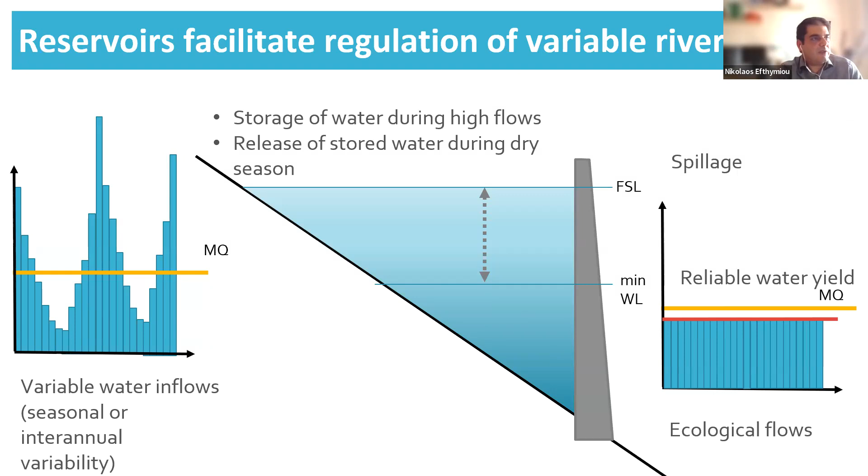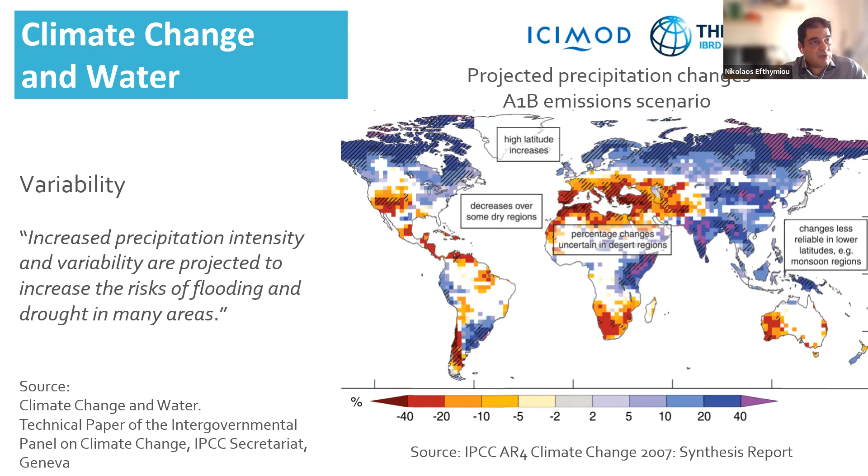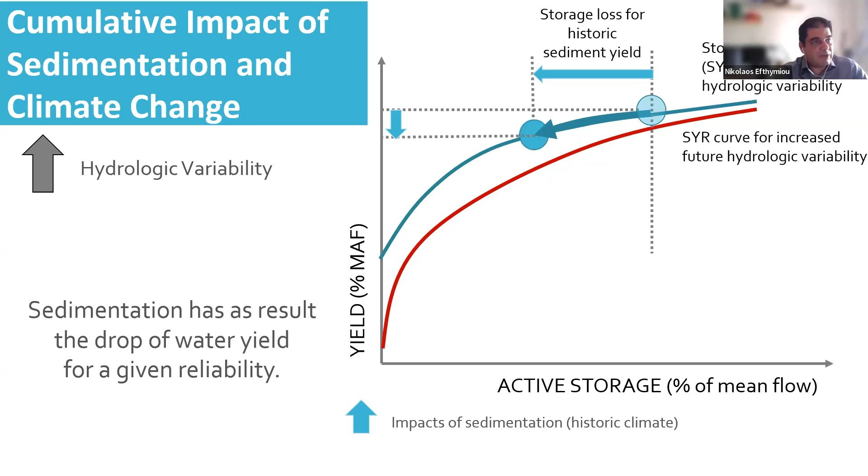So to start with, let's try within 5 or 10 minutes maximum to go through what we saw. I will use the same presentation. First we discussed how reservoirs provide regulation of the naturally variable river flows, why sedimentation is a natural enemy of reservoir storage, and what the global trends are with regards to storage loss due to sedimentation. We discussed the impacts of sedimentation on environment, economic performance and safety of reservoirs and dams, the relationship between climate change and water, not only availability but also variability. What is the combined effect of sedimentation and climate change? We said that climate change will magnify, will exacerbate the already adverse impact of sedimentation on the performance of reservoirs.

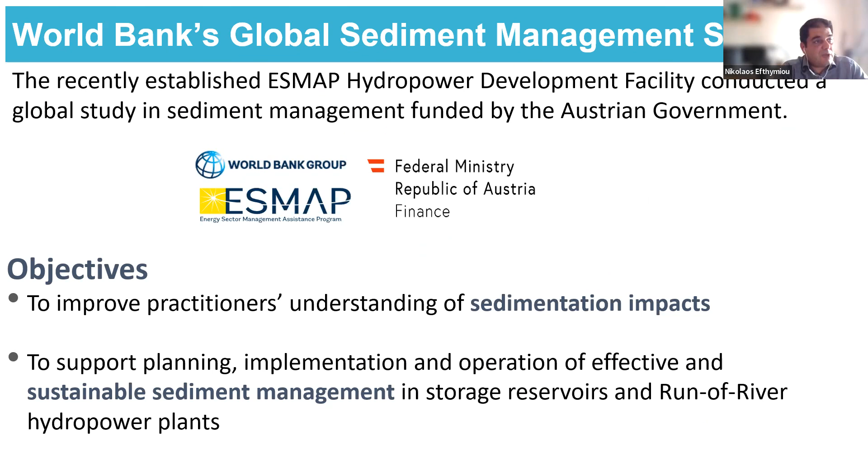And we discussed very briefly the available techniques or strategies to combat reservoir sedimentation: reduction of sediment yield, sediment routing techniques, and deposit removal techniques. A very short presentation of the global sediment management study that was conducted by the World Bank with funding from the Austrian Ministry of Finance, whereby RESCON 2 is a knowledge product of this study. What are the objectives of RESCON 2, which is mostly a preliminary screening of state-of-the-art sediment management alternatives at early project development phases when we have limited data?

What is the theoretical background? A possible source for resources on sediment management, the International Sediment Management Network HydroSedNet, which is freely available on the web. What are the limitations, where we clearly indicated that it is not a numerical model, so it is based on empirical equations and requires limited data. The philosophy is to apply this at the beginning of a project in order to gain a first idea on the risks related to sedimentation and possible sediment management countermeasures.

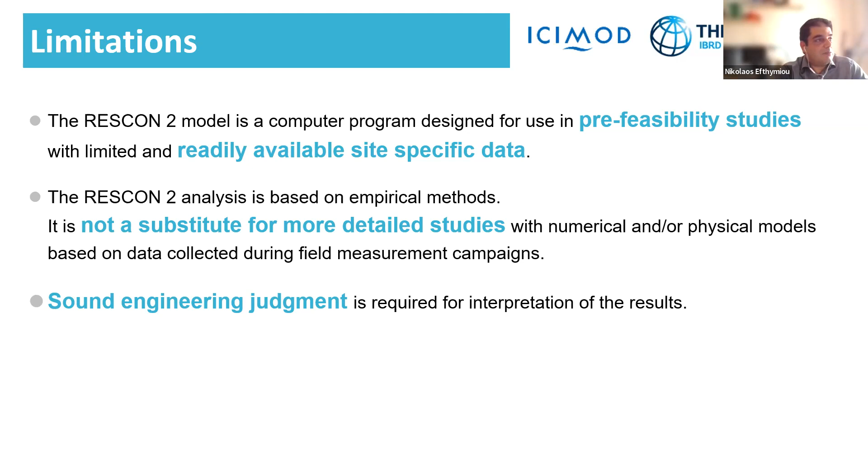The timeline, what are the questions: we start with the basic question, okay, what is the lifetime if we don't do anything? How can sediment management improve things for the historic climate? And of course, how can sediment management improve the resilience of the facility, build resilience into the system? The capabilities focus on sedimentation prediction, evaluation of sediment management alternatives, the economic appraisal, and the climate change analysis.

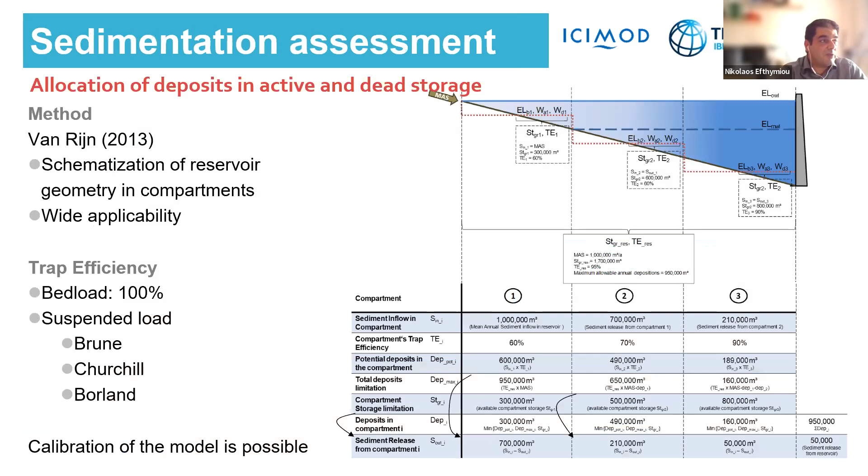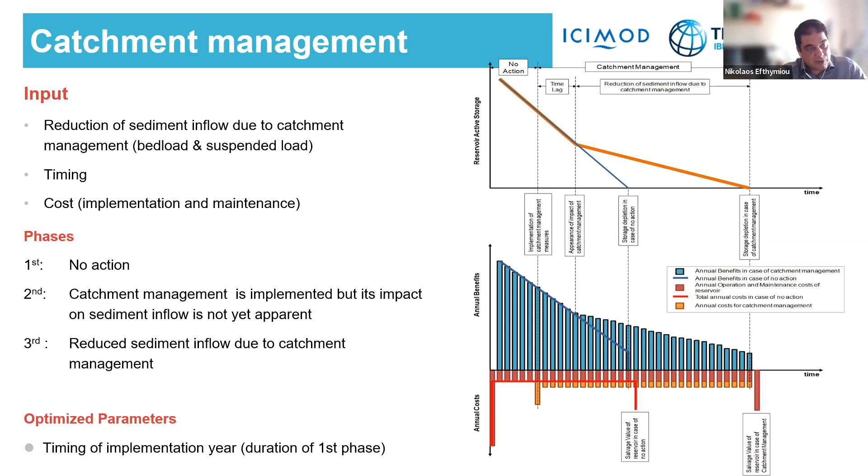We described the flow chart, the different steps for the assessment of the physical performance of the reservoir as well as economic performance. We gave an example to showcase how the extension of the reservoir lifetime can improve the economic performance of the reservoir, as well as to showcase that we must always consider that sediment management also comes at an additional cost that must, of course, be considered in any analysis we perform.

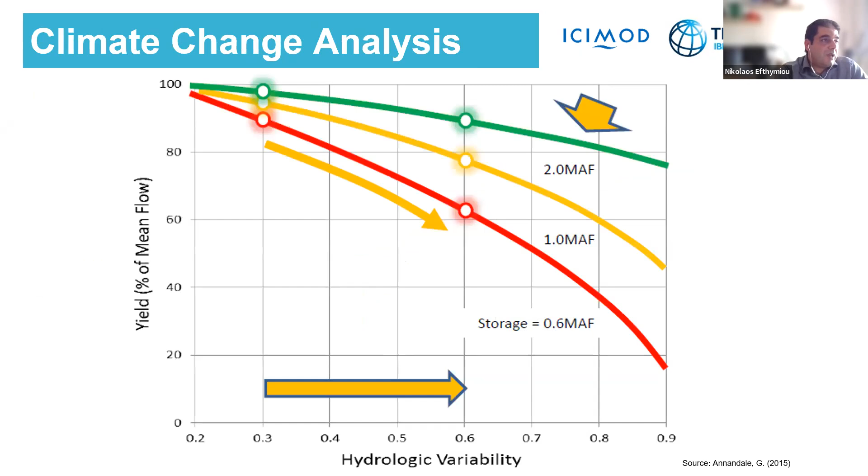We discussed the different types of water yields that can be provided by the reservoir depending on the requirements for flow regulation. We discussed the different types of discounting which are available in order to give value to the future benefits. Again, the climate change analysis and how sediment management can provide an adaptation to anticipated non-stationary climate conditions in the future, and the hydrologic response to changes, anomalies in temperature and precipitation.

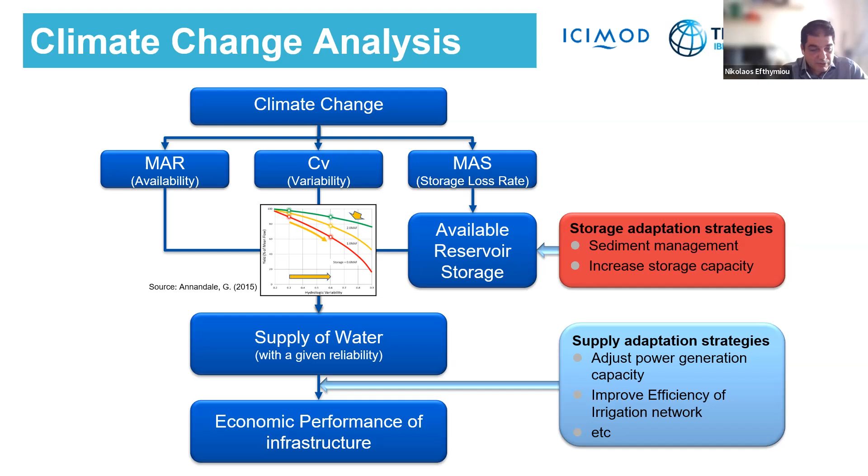A source for the climate change data, a very short indication of how we can see the sensitivity of the economic performance of the reservoir to different climate futures, which are predicted by the global circulation models. And this can be considered a sort of climate stress test for our reservoir to climate change. So all in all, that was what we discussed yesterday.

Then we proceeded with a demo example which we will build on today. We said that the main question we have is what happens if no sediment management is applied. And this is where we stopped yesterday. We saw how to interpret the plots that are generated in RESCON for the sedimentation prediction. And now we will see how we put the input for the economic appraisal for the revenues assessment, and we will also interpret the respective results. After this, I would like you to also open RESCON 2, import the demo file that is included in the training folder, and together we will work on the evaluation of the sediment management strategies.

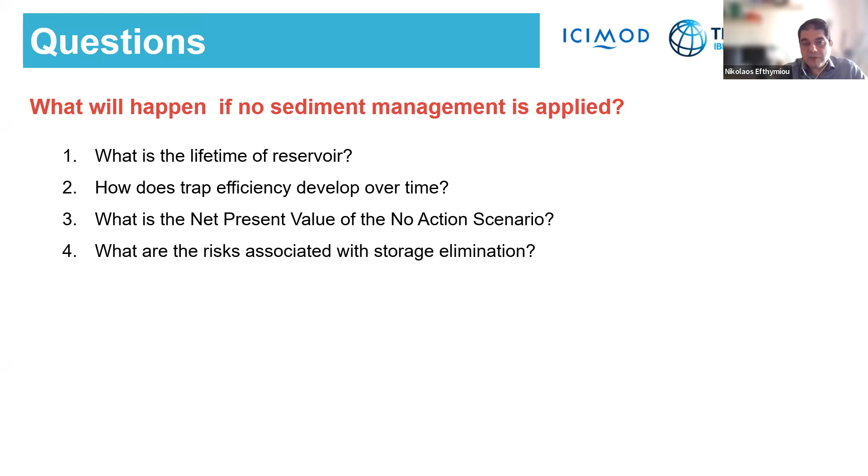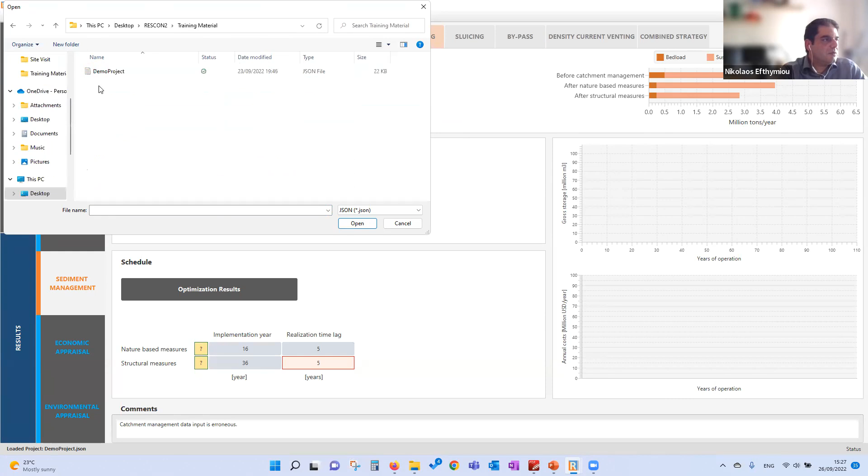So, turning back to RESCON, first let me just import the, sorry, need to find the demo project. So here we had 6.2 million tons per year sediment inflow. If you recall the slide with the presentation of the sample we are working on, we described the input for the cost assessment, we discussed the abrasion risk assessment, and we were on this slide where we are giving the input for the assessment of the revenues generated by the reservoir.

We also discussed the environmental appraisal, so I will not go into detail at this point. After this presentation of the revenues, I would like us to go together through the sediment management alternatives. So to complete the presentation of the basic input, the input that is needed to run at least the no action scenario. First you see we have two main groups. One is the water uses and the water yield evaluation. Here the priorities are fixed and ranked. We start with the most important priority.

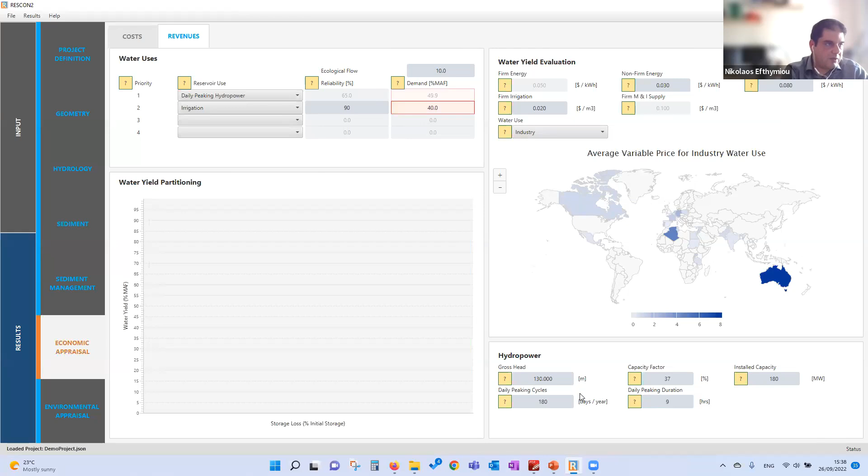Okay, so these are things that we have been trying to resolve in the meanwhile. So what you saw just right now: here, what we see is that the peaking operation will be affected by storage loss, that we see here on the horizontal axis, when the storage loss exceeds approximately 90%. In this case, we have a relatively large reservoir, and the reason is that it is a multi-purpose reservoir that is used also for irrigation.

At this point, the reservoir capacity will reach a level where it will not be possible to store the water that is needed in order to satisfy the peaking operation with duration of 9 hours. So this is why we see this drop here. And of course, at this level, we will not be able to provide any regulation to satisfy the demand for irrigation. So this is just an indication how the extension of reservoir lifetime and conservation of reservoir storage can protect the different beneficial water uses.

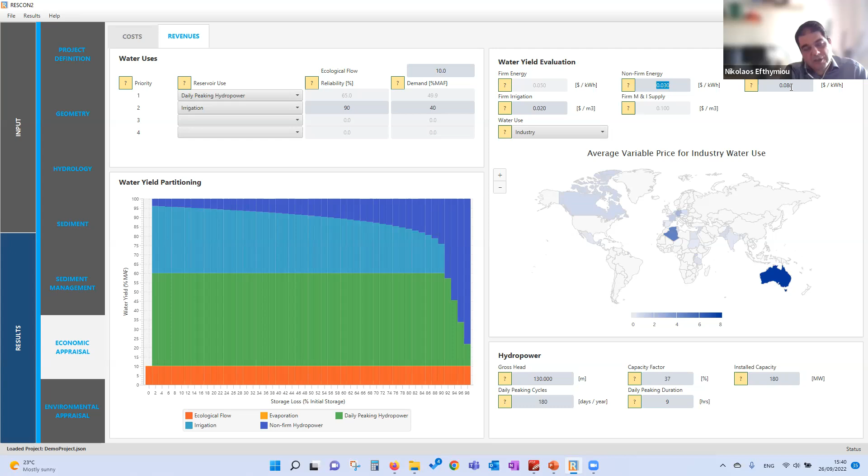So enough with this. Here, what we see is the unit rates that we need to specify in order to monetize the calculated water yields into revenues. Since we have a hydropower use, we have to specify the tariff, the cost in dollars per kilowatt hour for non-dependable, non-firm hydropower production. This is the dark blue color. And for the peak hydroelectricity. As expected, peak hydroelectricity is sold more expensive than the non-dependable run-of-river. This, of course, depends on the power purchase agreement and the legislation in the countries. We have also a different unit rate for the irrigation water yield that is supplied by the reservoir.

And here, this is just indicative. It's important to point out that this map gives some indications on costs for agriculture, domestic and industry water in different countries. This information is outdated. It was included in the manual of the first version of RESCON, but it is used to provide an indication of a range of values if this information is not available at early project development phases. Of course, inflation, the change of the conditions, must be considered. But this aims to provide support during the setup of the model and the preparation of the economic appraisal. So much to the input of revenues.

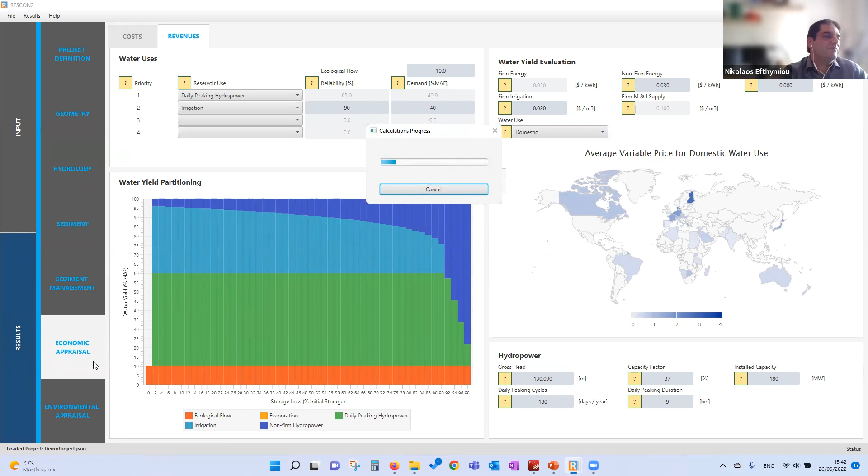Then, if we go to results, let's go to the second row here on this dashboard. First of all, we see again the same plot that we had earlier: how is the allocation of the water yield to the different water uses. Then, based on the specified unit rates, we see the revenues from the different water yields for the different beneficial uses. And here we see the long-term economic performance, which is the sum of the annual net present values calculated based on these annual revenues for different discounting concepts.

Here you see that the economic analysis shows that the aggregate NPV is $215 million. This is our main scenario, the classic exponential discounting, which, if I remember correctly, was performed with a discount rate of 3%, which is specified here.

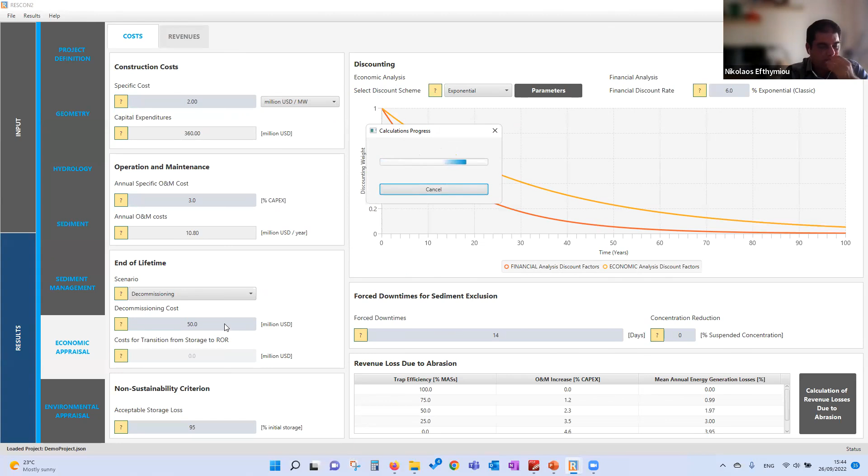Now, from my side, I think that we have seen how we specify the basic input. Now, if we go to sediment management, this is where I would like that we work together, that you will open RESCON, you will import the demo file that is included in the training folder, and then we discuss together how we can assess the different sediment management alternatives.

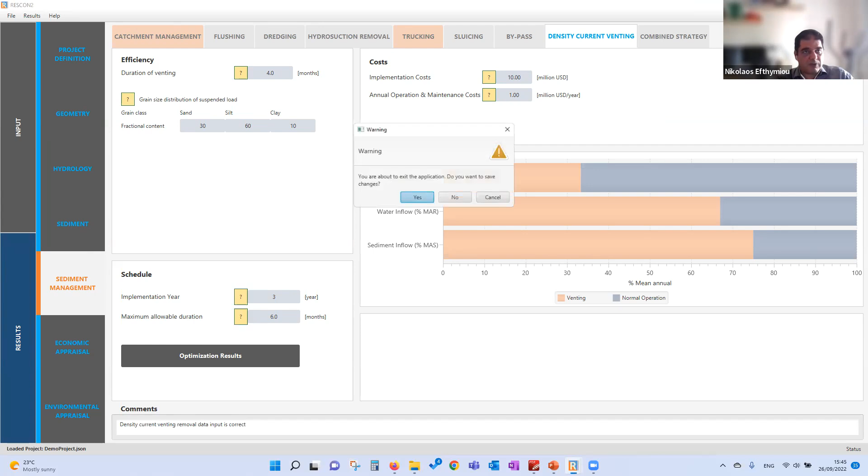Let me start RESCON again, and I will do import project data. I find the demo project and I open this. Please let me know if so far so good. If there are any issues, please raise hand at this phase, because this is an important step, so that everybody, apologies for the MacBook users, the Windows users are able to see the screen that we are looking at here.

So I understand that you are okay. Nicholas, can you repeat once how we import the project demo file? Yeah, how you import the demo? Okay, sorry. So I close this again. We open RESCON. You see the screen? Yes. And we go File, Import Project Data. Then you should see something similar to this. I choose now the location where I have the training material, and I open the demo project JSON file. Okay, thank you. Perfect.

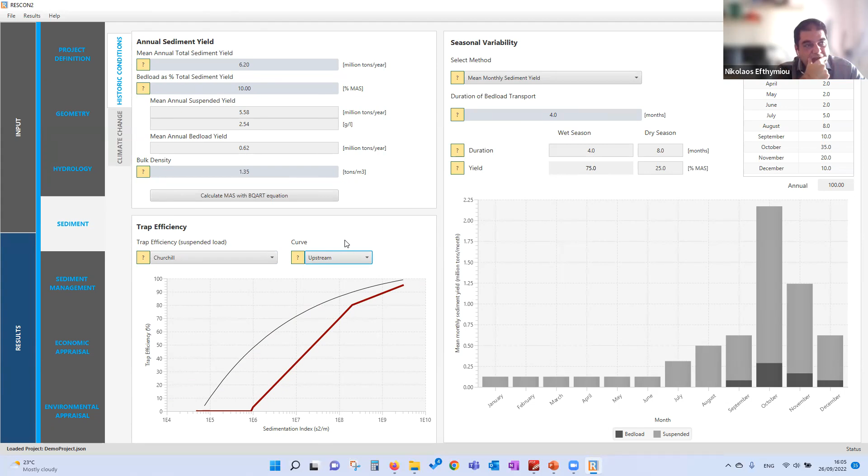I hope this answers the question; this was also one of the questions we received yesterday that we didn't have time for. Please let me know if you think this covers it.

Yeah, Nicholas, thank you so much. We have a couple of comments and a query. Subhas Thapa asks whether it is possible to view the graphs independently.

What do you mean? The graphs you can see, can we view the graphs independently, like individual graphs? For different, the results for different, so to see. Yes, for different parameters. Results for different. So in that case, what we are using, we go to results, export to XLS.

So we write here, now I don't remember, so I think it was Churchill, say now what I would do, Churchill, local, no action, and project, the demo project, so that I don't lose track. And I would save this. And here you see we have the calculated storage.

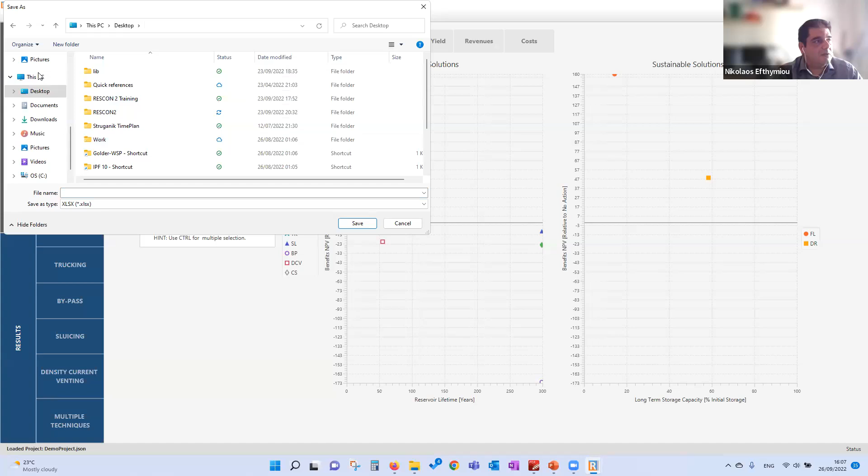Okay. And then what we would need to do is go back to input, sediment. Sorry, it was upstream what we had. Then we go to results, we must calculate first. So the calculation is performed when we press results. And I would go to results, export to XLS. So I will name it upstream.

And then this way we can compare the results of different calculations, even if we are talking for the same scenario. So that means no action, but we want to compare the different results. We will need to generate this Excel file in order to save the results. That was our thinking, because there are really so many parameters that can be changed. So we export this in Excel, and everyone can generate any graphs he thinks would be useful for the type of analysis he or she is conducting.

Yeah, thank you, Nicholas. That was really helpful. I think the others are just brief comments. I'm not sure about the Bharat Paudilji. There is no annual sediment yield showing in sediment section of input. Could you perhaps share your screen to have a look on this? Oh, let me share. Or Bharatji, the issue is resolved? It is resolved, okay. Yeah, the issue has been resolved. So back to you, Nicholas.

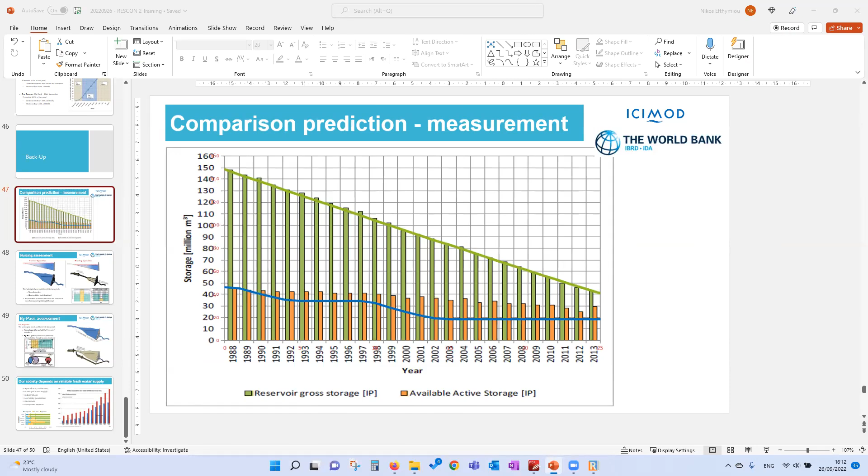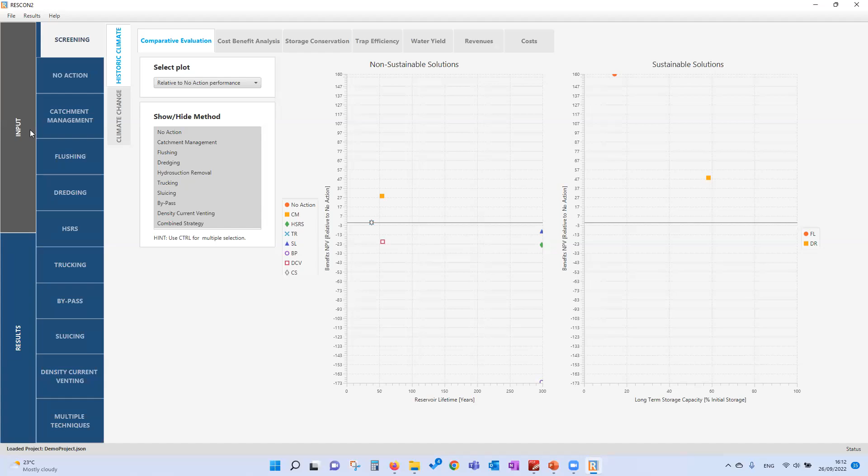Nicholas, could I speak? Yeah, of course. I want to mention that in our trap efficiency curve, I don't have the option of median. There is lower, upper and median, but the median option I cannot select in my case. And another thing is in annual sediment yield, the words or the options are overlapping. This has to do, I think, with you using a small screen. So in your laptop, could that be the case?

So in that case, let me show you how you can do this. You right click on the desktop, and then you go to display settings. And then you can change the display resolution, for example, or the scale. And this way you won't have this issue with the overlapping. The reason was that we need to have a minimum size of the screen. What should be the resolution, Nicholas? What should be the resolution I have to select? Okay, yeah. So the maximum resolution.

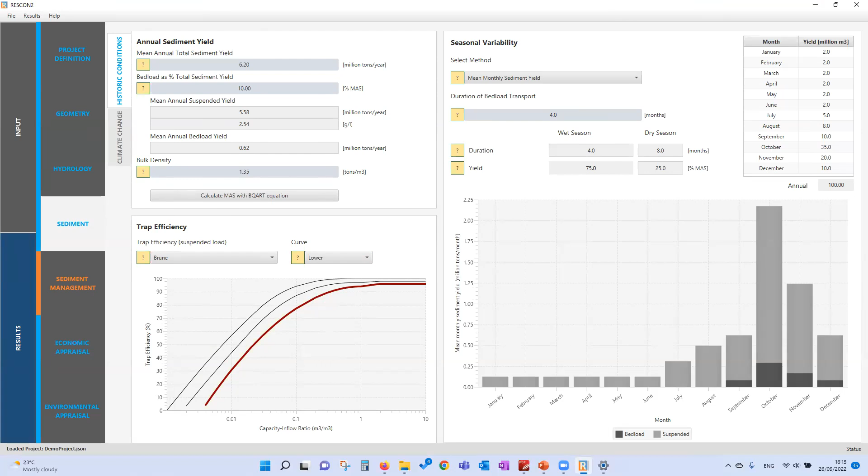Did anybody else see this? No, all good now. So back to you, Nicholas, to proceed ahead.

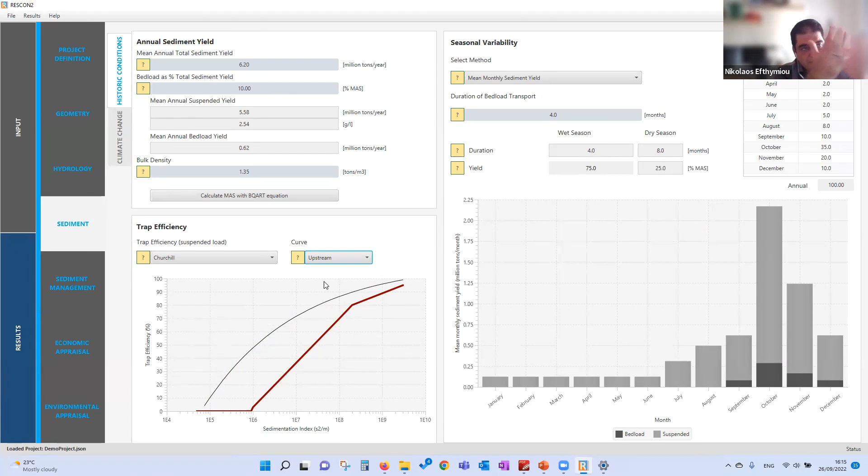Okay. Thank you. So let's go to sediment management. So look, now I have Churchill and upstream as trap efficiency, because we saw that this way we approach the measured storage development. We have the best possible agreement with these options for trap efficiency between measured and calculated storage. So please set as trap efficiency Churchill and upstream. Sorry, my mistake. Sediment, Churchill, and local, because we have no retention upstream.

So we have the 38 years lifetime. Let's go back to results. Let's go to sediment management. And now here, first of all, you see that we have this orange bar here. This shows that there is a mistake somewhere. Then we see that we have catchment management, orange, and trucking, orange. So that means the inputs that we have now in our project file are okay, but there is a mistake in catchment management and in trucking.

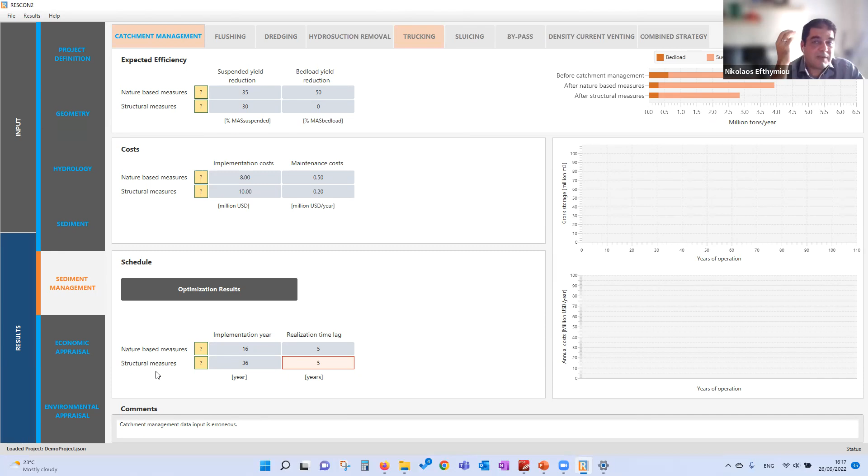And then we see that here we have a mistake at the realization time lag for structural measures. So now, this is my question for you. You remember we calculated a lifetime of 38 years, correct, for the no action scenario. And we see that this 5 that we have here is wrong. Any explanation why this is considered by the model to be wrong?

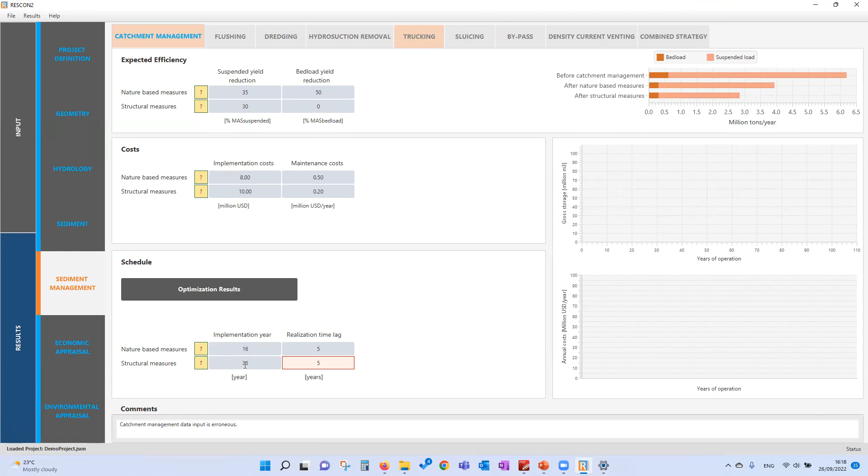All right. So look, we said that the reservoir, if we don't apply any sediment management, will have a lifetime of 38 years, correct? And here what we are specifying is to implement structural measures after 36 years, but the impact on sediment yield reduction will be realized 5 years after implementation of the measures. 36 and 5 makes 41 years.

So that means we are specifying a sediment management strategy which will become effective after our reservoir is totally full with sediment. So this doesn't make sense. Why should we want to reduce the sediment yield arriving at our reservoir when we actually don't have any reservoir? So for this reason, if we do this one, I hope it will work. So you can see that then we can proceed with the calculation of catchment management.

So here now let's go to catchment management. What we can do. First of all, we need to specify what is...

So Sanita, we will come back to you. So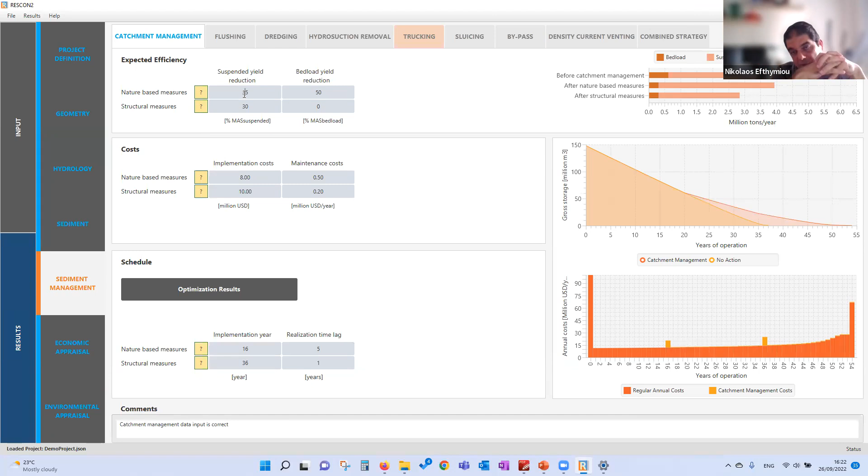Okay, usually if we have an upstream catchment in a normal condition, then based on publications, we can expect a reduction of suspended load of 20 or 30%, and with bed load, depending on the type of measures, we can expect a reduction of 20, 50%, 60%. So what I want to say is don't expect that you can really minimize the sediment inflow.

But what you have to keep in mind is that this depends on the condition of the catchment. If we have a catchment without any vegetation, then if we make a reforestation, of course, this will have a very significant impact. But if we have a catchment with different land uses, where we have forest, where we have agriculture and so on, then, of course, not 80%, but we can expect a reduction of the sediment yield of 30, 40%, 20%. This depends on the extent of the catchment management measures.

As said, this is a separate analysis, and what we are doing here can help to bring together the two different types of analysis. One is the reservoir, the other is the measures in the upstream catchment. Then we need to implement a rough assessment of the respective costs, and then the implementation schedule needs to be specified.

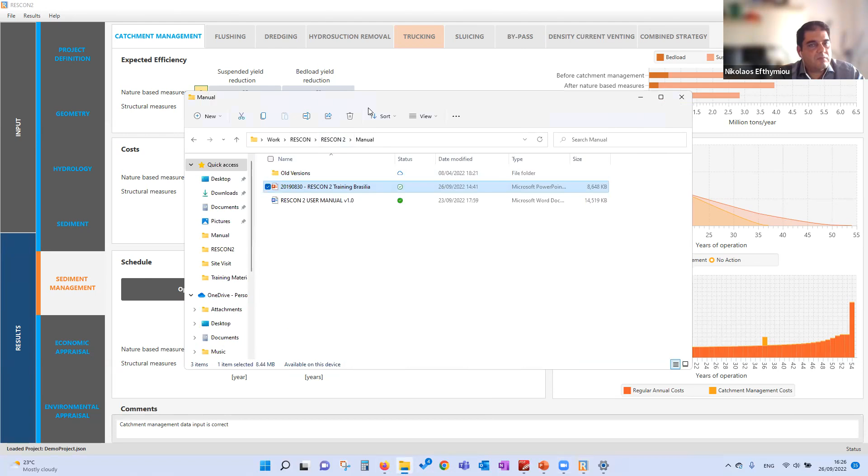Nikolaos, in the meantime, while we are working on this, I have a query for you from Vivek Kushal. He's asking, is it possible to apply measures taken in a similar catchment in case of unavailability of catchment sediment interventions?

Vivek. Vivekji, are you there? I don't think. Yeah. Vivek, perhaps to elaborate a little bit on the question. Yeah. Okay. Vivekji, are you there? Hi, Nikolaos. Yeah.

Hi, Vivek. What I was trying to ask is, if we have applied some intervention measure in a catchment of similar topography or geology, then can we take the results from that catchment and apply some data from it to formulate our sediment management measure in the catchment we are modeling?

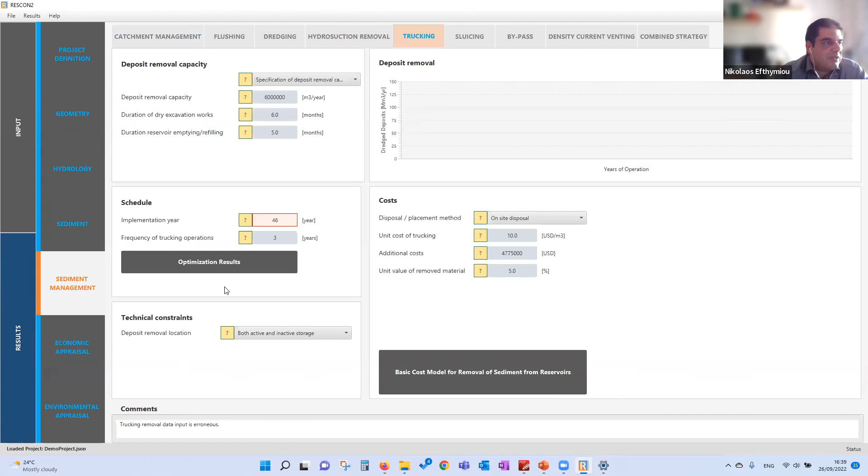As a next step, I would like us to go to dredging. On purpose I changed the sediment inflow from 4 to 6.2 because I wanted to show the calibration, as well as the mistakes that are created in the model and how they can be identified. Here we have again the same mistake in flushing. If we set this to 10, then flushing is implemented before the full sedimentation of our reservoir. So this resolves the problem.

Now let's go to dredging, and keep in mind that the analysis is very similar to flushing. With dredging, we have two answers to two possible questions. The first is, what is the amount of sediment that we must remove with dredging from our reservoir in order to have a sustainable reservoir? This is the question we are asking by setting the combo box to sustainable solution with technical constraints. The other question is, what will happen to our reservoir if we remove, not 32 million, but 3.2 million cubic meters every year?

Okay, then the other input that we give is, okay, when will we implement dredging? First, we need to say when we will start with dredging and how often we will perform dredging. Here, what we see is that we will start after 15 years and we will perform dredging every 1 year.

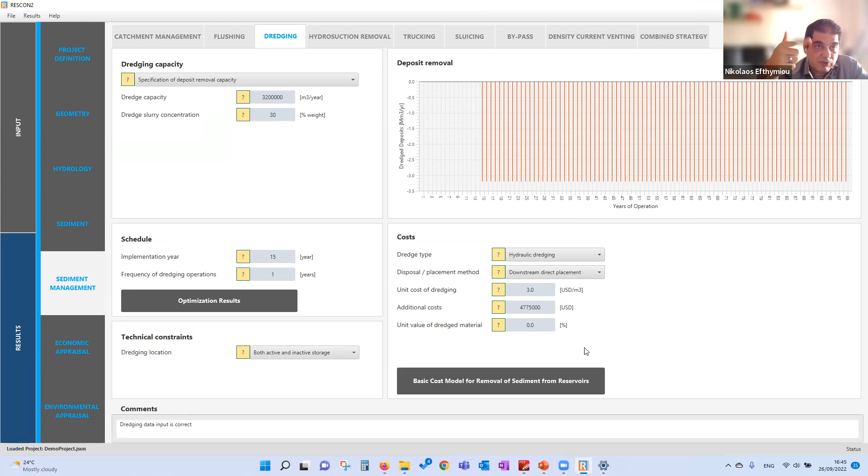And sometimes, if we place the material in upland disposal areas, this material can be reclaimed for beneficial services. For example, sand and gravel can be used as a construction material. Silty sandy material is good for agriculture. So this is something that might give an additional revenue benefit to the dredging operation.

Usually, the unit cost must be obtained based on experience from similar projects. As a preliminary assessment, if this information is not available, we have implemented some guidance from a basic dredging cost model that has been developed by an American dredging company, and which provides indicative unit rates for different components of the dredging activity, as well as for the additional costs. Here we are considering a unit cost of dredging of $3 per cubic meter. This would apply to hydraulic dredging, downstream direct placement.

And so here at this point, I would like you to try different inputs, see what is the reaction of the storage development, and perhaps, after a few minutes, let us discuss these results.

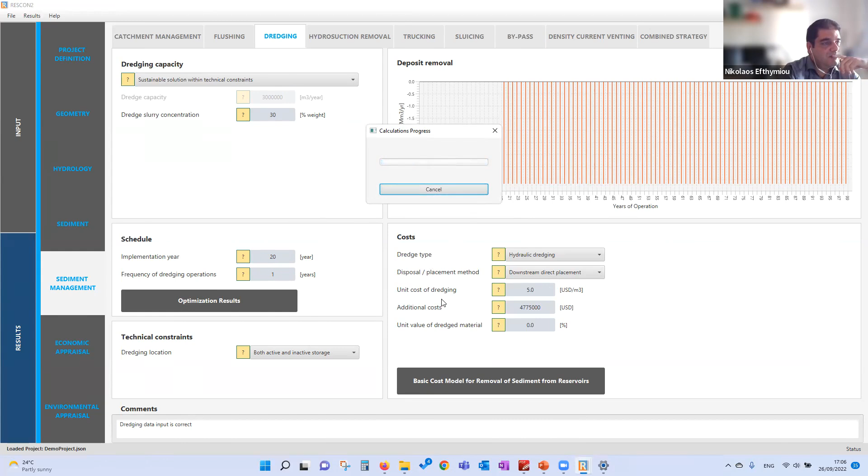Now, Subhas, as you said, if we select sustainable solution and say we implement this after 20 years, we see that in order to sustain the storage capacity at the level that we have after 20 years, we will need to remove 4 million every year. This is a first indication. And if we go to results, we see that here is the point where we implement dredging. And if we remove 4 million every year, approximately, then we can sustain the storage capacity.

The key takeaway here is that, look, here you can specify when you would like to start with dredging. And if you press sustainable solution, it will tell you how much sediment you must remove with dredging this year. The other question is, okay, say that I have a dredge equipment and I want to specify my dredging equipment. I want to see what will happen in my reservoir if I remove 3 or 2 or 5 millions every year, and I start year 5. This way you can see what is the response of the reservoir.

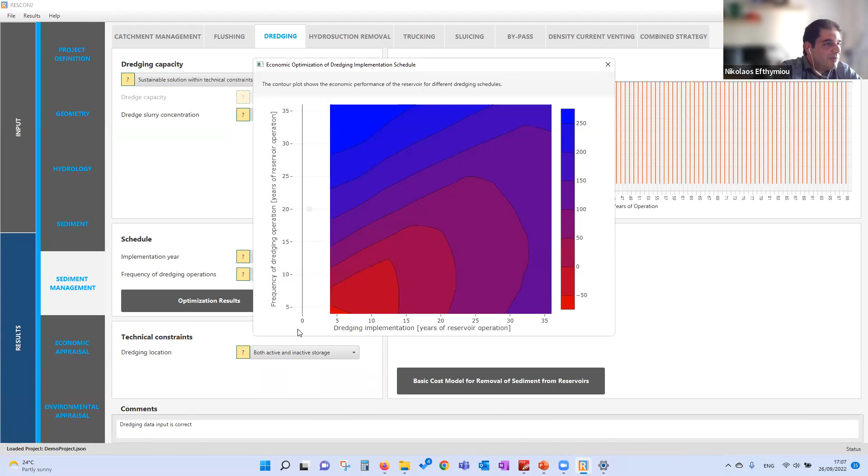Okay. Again, we have same plots for optimization. This looks much more complicated than the previous plot for the catchment management. So here what we see is that with dredging, in that case, it is better to start early and perhaps not perform very frequent.

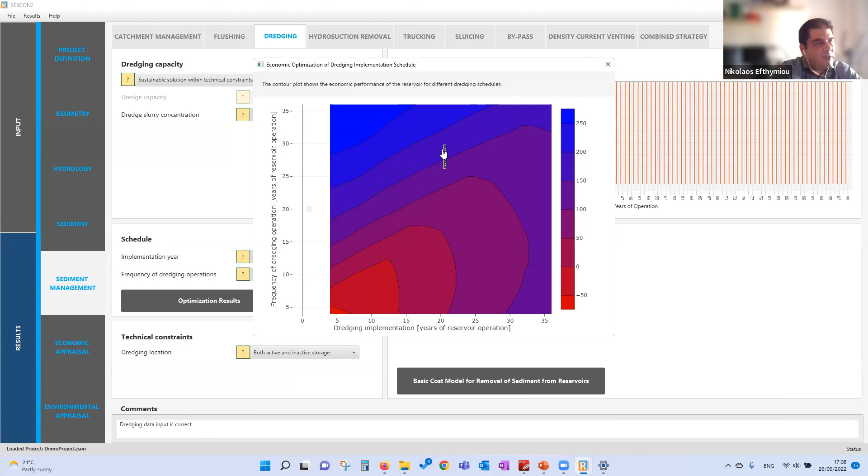Now I would like to move to trucking. I told you that trucking is very similar. The main difference to dredging is that we have significantly higher water losses. Let me go to results. Here we say that we will remove every year, say 3 million. Okay, starting the 10th year, we will perform trucking every 3 years. And here you need to consider that in order to perform trucking, we must empty our reservoir, keep it dry for a duration of the earth moving works, so that we have the earth moving equipment entering our reservoir and removing the material.

So the water losses for trucking are significant. This is something that we must consider. And usually trucking is also relatively more expensive than dredging, depending of course on the amounts that we need to remove.

So we go again back to results. And here what you see is that after the 10th year, actually the year when we are performing trucking, we generate practically zero revenues. Exactly because for the biggest part of the year, we need to have our reservoir empty. That means the water inflow during this period is released downstream and cannot be used for beneficial uses. Okay, and of course you see that we have a very bad economic performance here.

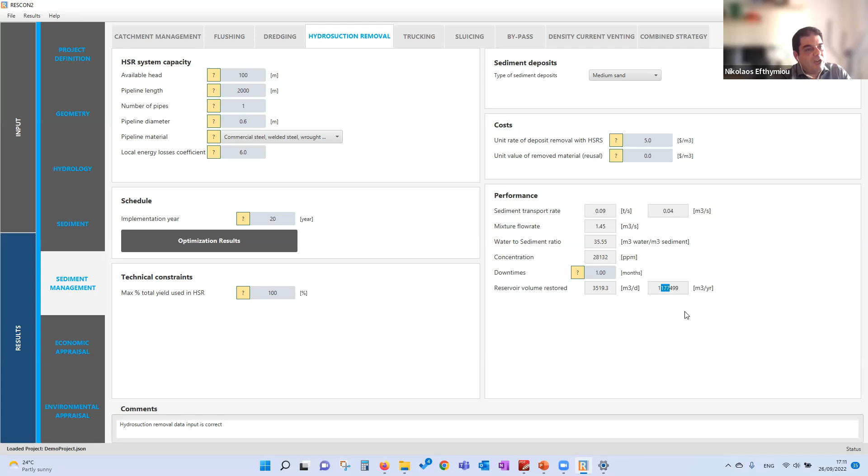This is calculated with an empirical method that has been presented by Hotchkiss in '95. There are also different methods to calculate the performance of hydrosuction. And here we see that actually we can remove, in that case, approximately 1.2 million cubic meter per year. This is the result of the internal calculation. And if we increase the head to 120 meters, then we see that we have a better performance of the hydrosuction, because we have more gravitational head for the siphoning of the sediment deposits.

So here we have one parameter. We assume that hydrosuction will be performed on an annual basis. So that's why we have this plot for the optimization. And here we see that actually hydrosuction would be optimized approximately after 20 years of operation.

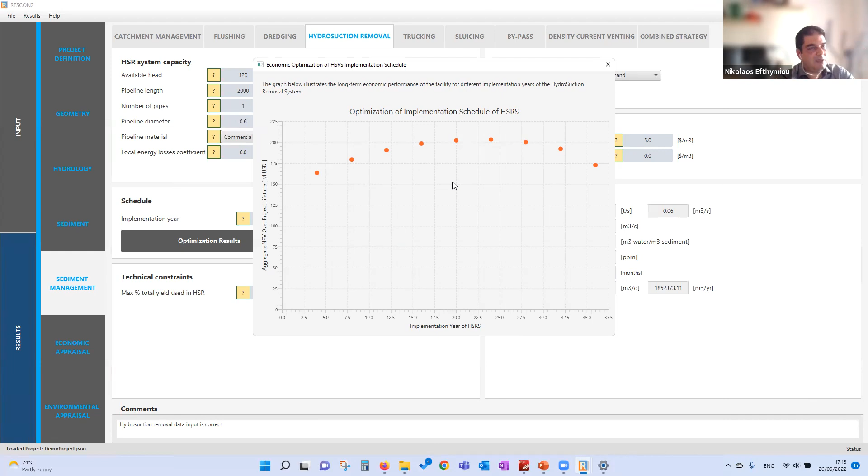The reason for this is that actually the sediment delta by that time would have approached closer to the dam. So that means we would have more availability of sediment deposits in shorter distance from the dam, and hydrosuction would be more effective because we have shorter distance between top delta foreset and release of the discharge pipeline. Of course, this depends also on the type of the sediment deposits. It's easier to remove sandy material than to remove gravel material.

So at this point, I would like you to take again 5 minutes to play a bit around with flushing and hydrosuction. We discussed thoroughly about dredging, so that you get an impression of the reaction of the reservoir, both the sedimentation development and the economic performance to different parameters. And then let's discuss 2 or 3 minutes about this, and then we move on with the other alternatives.

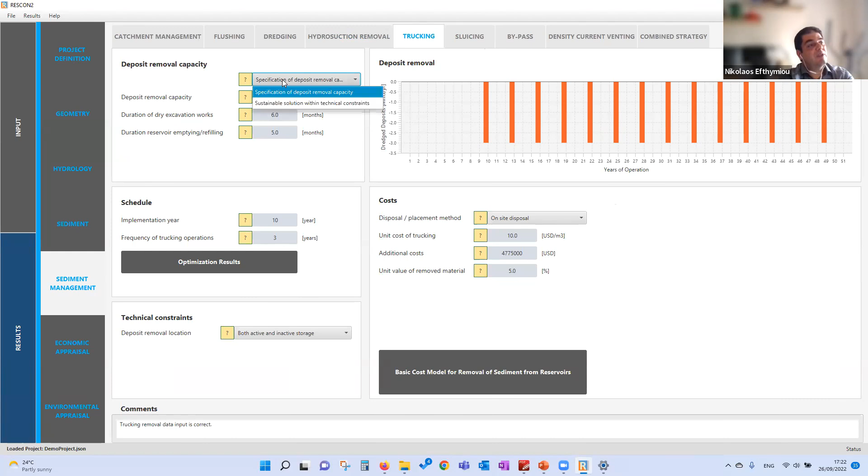Okay. Let me just say a few things. Look, with flushing, again, we have the same logic as with dredging. So we can answer two types of questions: what is the amount of material that needs to be removed during each event in order to have sustainable conservation of our reservoir storage after the time we implement this alternative, and what is the development if we remove during each event a specific amount of sediment. So I would not say that there is a big difference, and the logic is more or less the same.

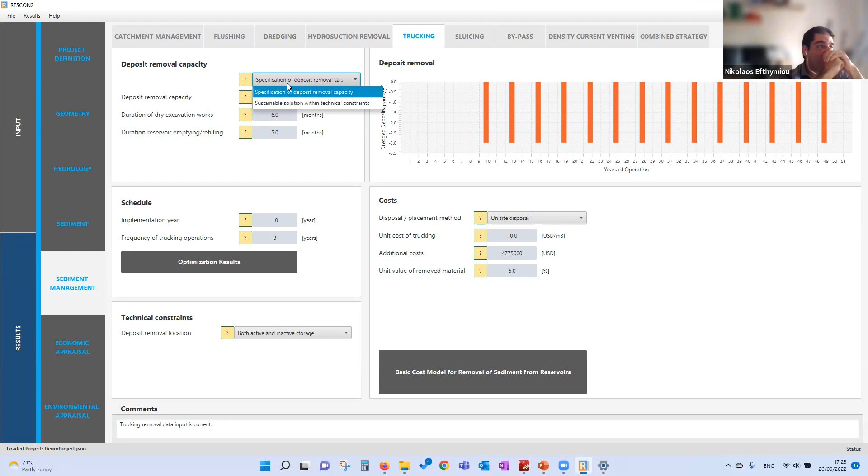The important difference is that flushing is associated with higher downtimes and outages, meaning more water losses and revenue losses than dredging. Now for hydrosuction, say that we have 100 meter available head, and we will implement hydrosuction after 10 years. We go to results.

So we see that we are removing close to 1.2 million cubic meter per year after the implementation. We have insignificant water losses for hydrosuction, and we have an extension of the reservoir lifetime from 38 to close to 50 years, and then we maintain this residual storage capacity of 1.2 million. This is the amount that we can remove every year.

Now, if we go to input and we say that we have 120 meter head and we use 2 pipes, you see that we can remove 3.7 million cubic meter per year. And we go to results. You see that we have a different picture. So hydrosuction is much more effective. The reason is that we have more head, so actually more energy to remove material. And we have doubled the pipelines that are used. So these are the key parameters.

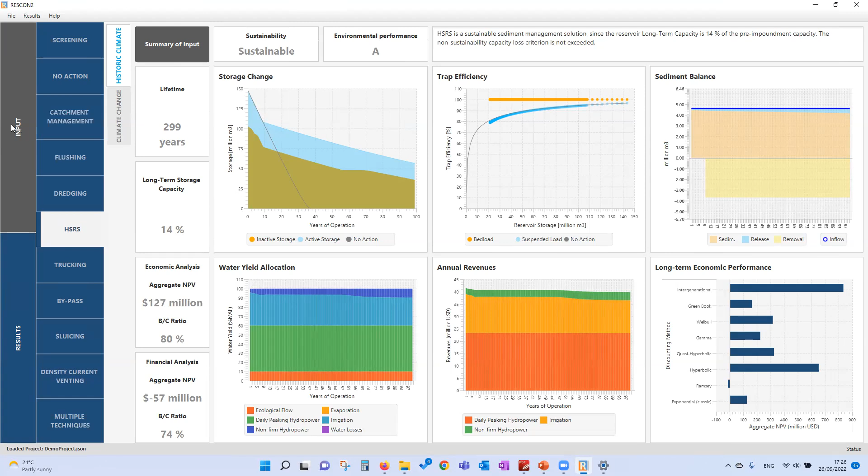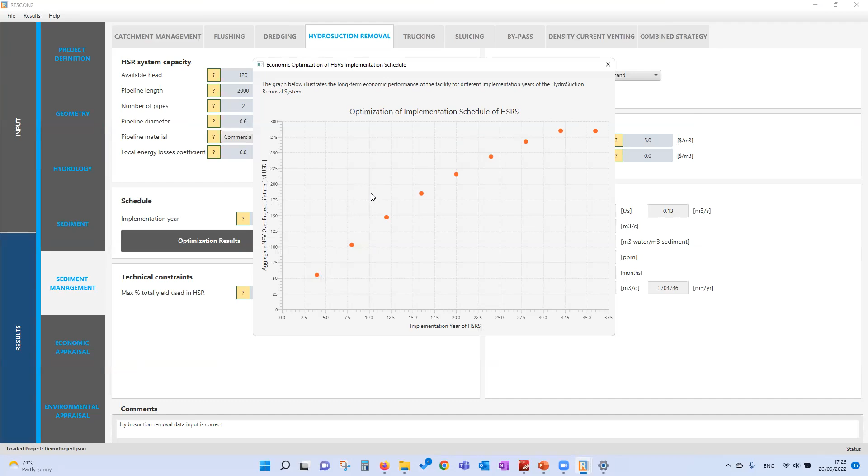Another thing is that in the optimization chart which you have also inserted there, it shows the most optimal time for the implementation of hydrosuction is around 20 years. Correct? So is it due to the capex, capital expenditures related to installation of hydrosuction infrastructure, or are there any technical reasons? Because I found that very interesting.

Look, what we say here, given this example, is that the pipeline length for the hydrosuction is 2 kilometers. So if we install it the first year, our reservoir has a length of 3.5 kilometers, if you remember. So if we implement hydrosuction from the first year, we can remove deposits that extend practically 2 kilometers upstream of the dam.

But the first year of reservoir, we said that delta progresses from the reservoir headwaters toward the dam, right? So that means the first year of operation, at the distance of 2 kilometers from the dam, we don't expect to have deposits because the deposits are located further upstream, close to the reservoir headwaters.

After a few years, and as the delta progresses, then actually we are removing sediment effectively. So practically what this shows is that there is no need to implement so early hydrosuction in a reservoir with a distance of 3.5 kilometers, because we don't have sediment to remove at the distance of 2 kilometers. If we wait until the delta reaches the area, then it is the time when hydrosuction becomes effective. I hope this answers the question.

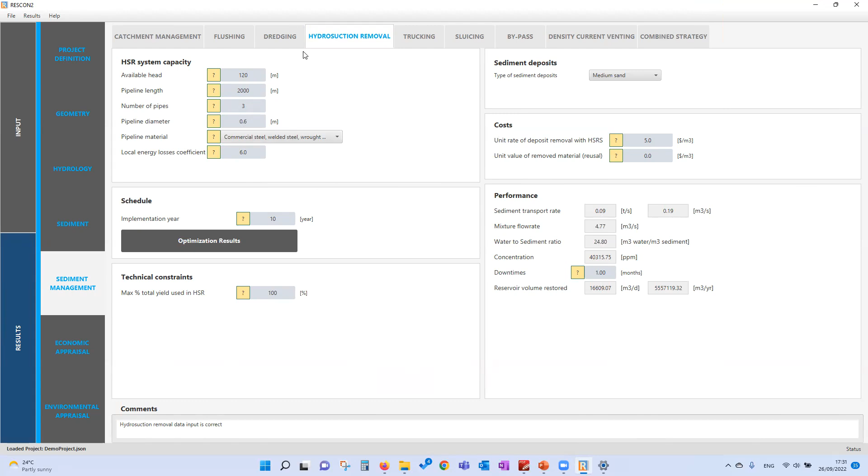So then we go to flushing and look here, the controlling parameters: how aggressive flushing will be is what is the flushing discharge. So here it's important to point out that we are talking about reservoir empty flushing. That means we will empty our reservoir till this elevation, the water level at dam during flushing. This is going to be the invert of the flushing channel that will be scoured in the sediment deposits. Here, this is a typical cross-section of our reservoir.

And 180, here is the elevation where we have the drawdown during flushing operation. This is the average discharge during the flushing event. Okay. Here we specify what is the duration for flushing during drawdown conditions, how much time it takes to empty the reservoir. And here we specify also parameters that can help us calibrate the flushing assessment.

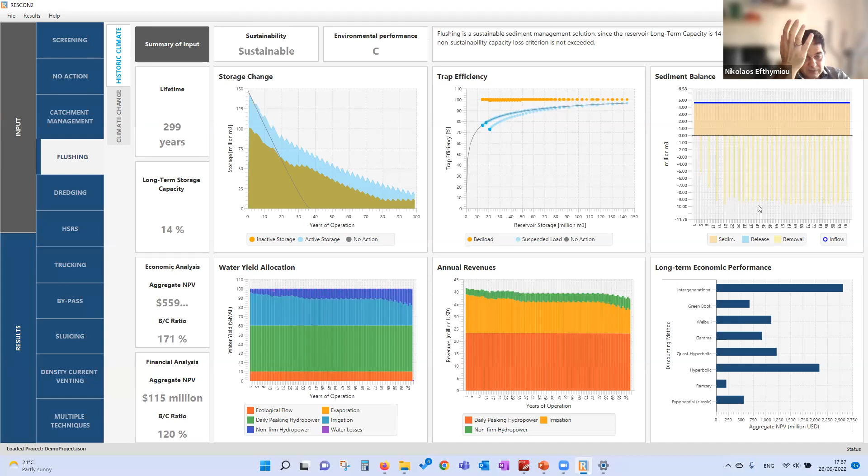The principle is again the same. Here you see, perhaps it's a little bit difficult to identify the deposit removal. Yesterday we had a question about downstream impacts. What I would like you to consider is that in a very short time, here we said perform flushing every 3 years, we release downstream a big amount of sediment deposits, in this case 9 million.

You can imagine that we have the sedimentation that occurred during 3 years within the area where flushing is effective, and we remove the sediment deposits in a very short time of 1 day. This creates an overloading, a sediment pulse downstream, that is very difficult for the river to manage. So this is why flushing requires very careful planning.

We must consider how much water will be released downstream and how often flushing will be performed, and we really try to reduce the amount of sediment deposits removed during this very short time period in order to reduce the concentration that is released downstream.

As said, there is a lot of work done in different countries, especially in Switzerland and France, on environmentally adapted flushing, which is combined with sediment monitoring, and the purpose is to avoid exceeding specific sediment concentration thresholds that might be harmful for the aquatic population downstream of the dam.

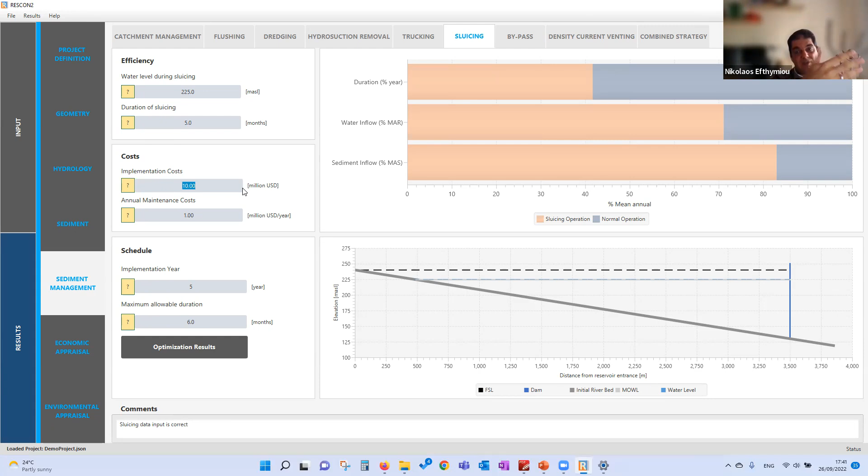Again, we need an assessment of the respective costs for the implementation. For example, if our reservoir doesn't have a gated spillway, it's not possible to control the water level as we would like and to have controlled hydraulic conditions in our reservoir. In that case, we would need to retrofit a spillway suitable for sluicing operation. And again, we need to specify the schedule. For bypass, it is the same principle that we are applying, and for density current venting.

At this point, I would like you to take a few minutes to change parameters to see how it reacts, and then let us discuss shortly the reaction of the reservoir to different combinations of parameters for sluicing, bypass, and density current venting.

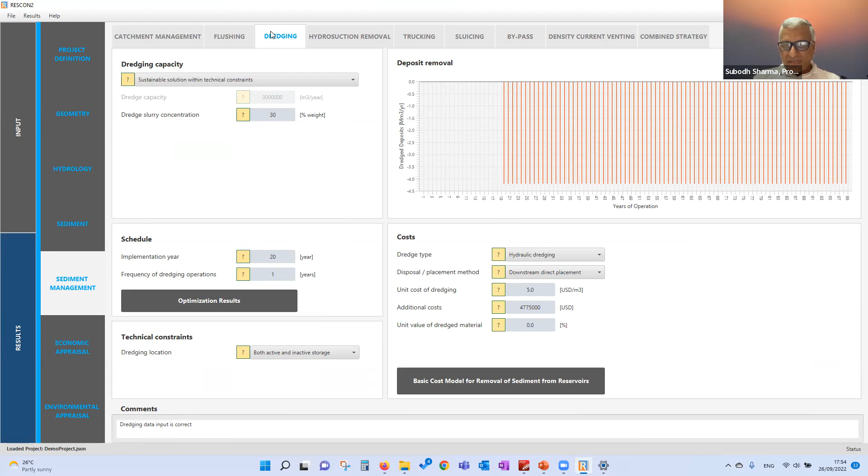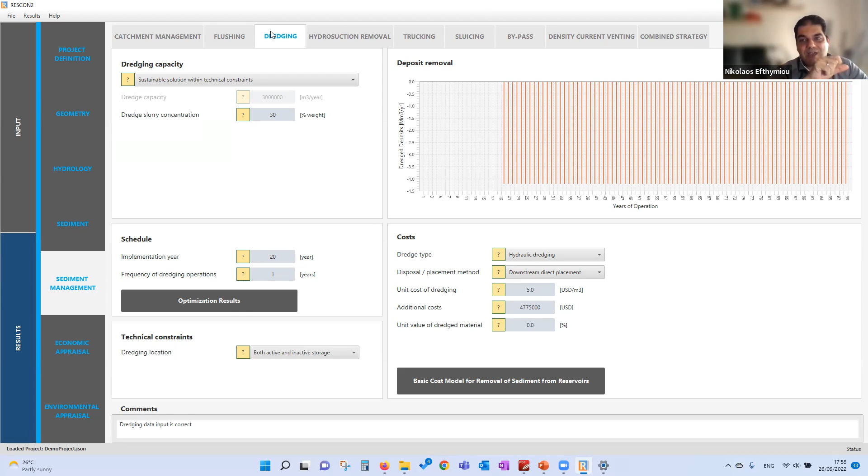Mm-hmm. Professor, thank you very much for the intervention. Very interesting, as you say. So the downstream impacts are important aspects that must be considered. Unfortunately, in RESCON, the seasonal variability of flow on the dredging assessment is not considered. But if you remember in the presentation, one point was that engineering judgment is required. So it's a combination of sedimentation assessment, downstream impacts, and the prevailing hydrology.

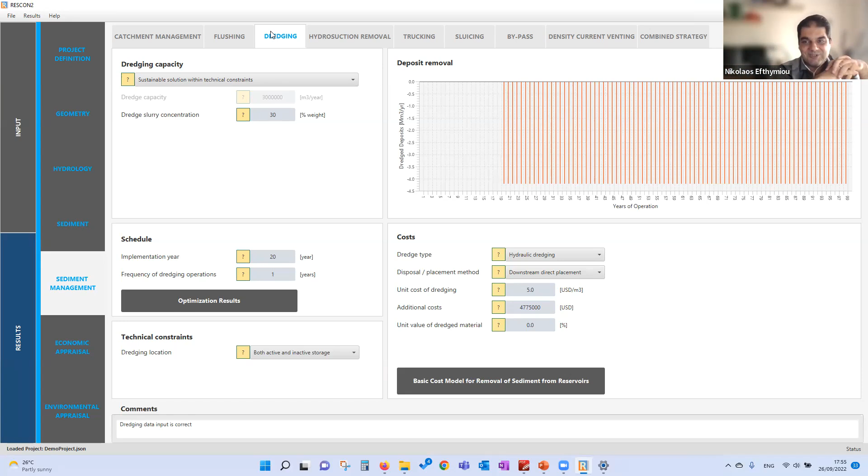And of course, this model provides some indication on the amounts. When we go to downstream, then all of what you mentioned must be considered. And sound engineering judgment is very important. So thank you very much for your comment in this lecture.

Yeah, thank you for responding. It's really helpful.

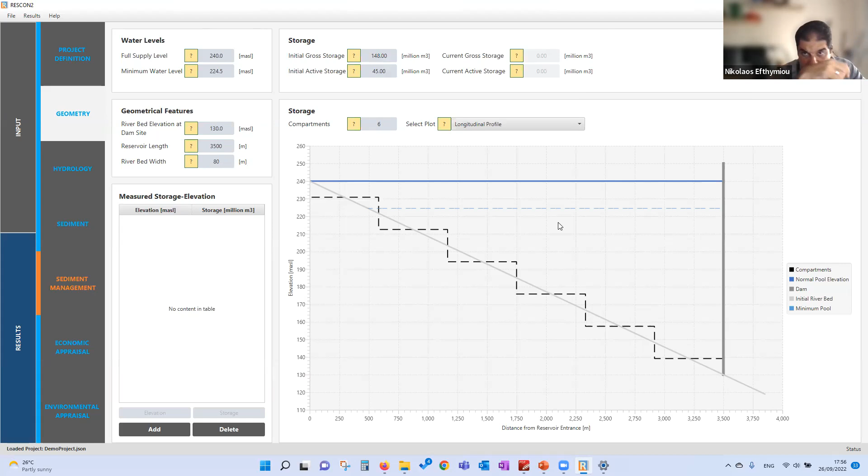Okay. So now when we go to sluicing, I see there was a comment that we had a specification of water level during sluicing of 100 meters. So this should generate an error in the assessment, meaning that this is not an acceptable input. The reason for this is that the lowest point of our reservoir, the riverbed elevation at the dam axis, is at 130 meters above sea level. So we cannot have a water level drawdown below 130. I hope that this explains the reason for this error.

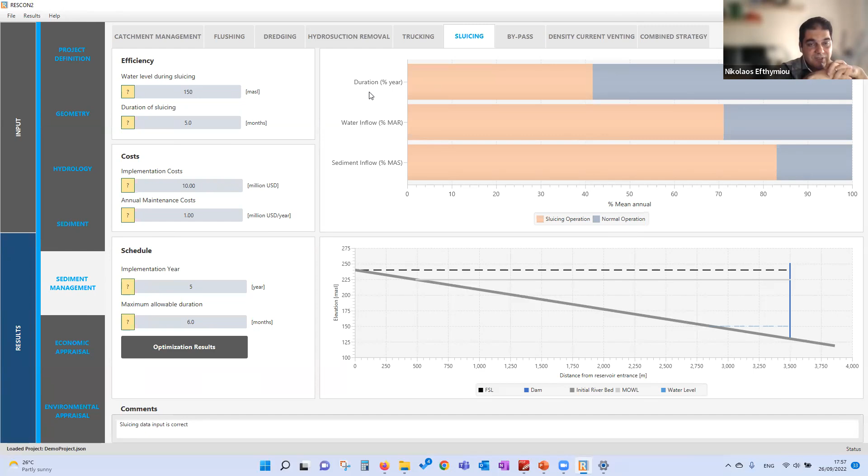So at this point, anyone who would like to give some impressions of the performance of the reservoir for different parameters affecting the efficiency of sluicing or bypass? I see that you prefer to put the questions in the chat. That's okay. Let me perhaps give a comparative evaluation. Say that we have a water level during sluicing of 225. We go to results and we have a duration of 5 months.

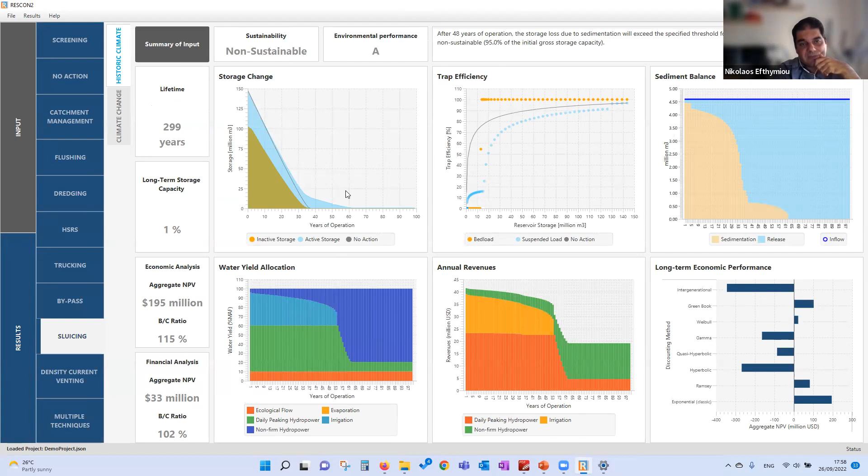First of all, I would like you to see that in the first years, sluicing is not very effective. Try to imagine that we have an empty reservoir. We lower the water level during the wet season, but at the same time our dead storage is relatively empty. So what we are doing is a rearrangement of the sedimentation, moving sediment from the delta to the deeper parts. For this reason, we don't see any significant impact on the active storage development.

And we start seeing the impact compared to no action after a few years, when we have filled our dead storage, and at that point we start protecting the active storage more. The other point I would like to highlight in the economic performance is that we don't see water losses for sluicing. The reason is, if we go back to geometry, the water level during sluicing is at 225 meters above sea level, and our minimum operating water level is at 224.5. So during sluicing, we can run our turbines.

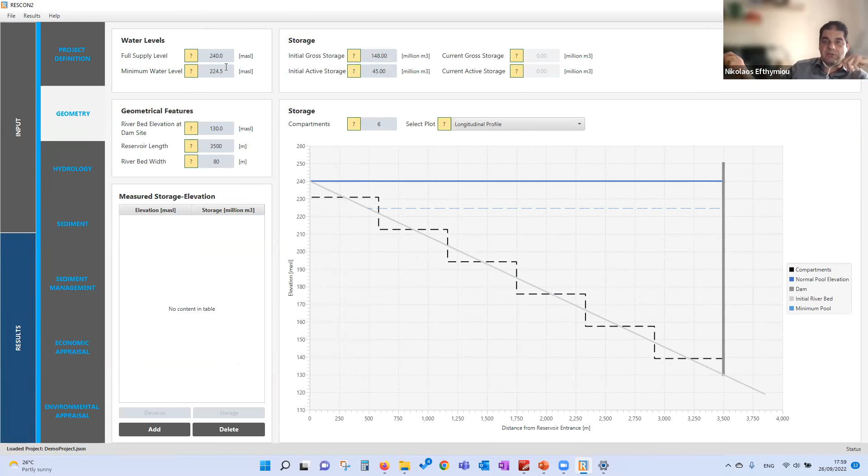Now, if we go to sluicing and we say, okay, what will happen if I do a very aggressive water level drawdown to 180 meters above sea level, we go to results.

We see that sluicing is much more effective, but at the same time, we see that this affects a lot the economic performance of the reservoir. The reason is that for 5 months, actually the 5 wettest months of the year, we're saying, okay, I will operate my reservoir below the minimum operating water level.

I will not generate. I will not be able to store water for the dry season, since we have the storage operation. On one hand, I can sustain the storage capacity, but on the other hand, I cannot use the water that arrives during the sluicing period for the beneficial services. So this is something that needs to be considered. This is the compromise during sluicing planning.

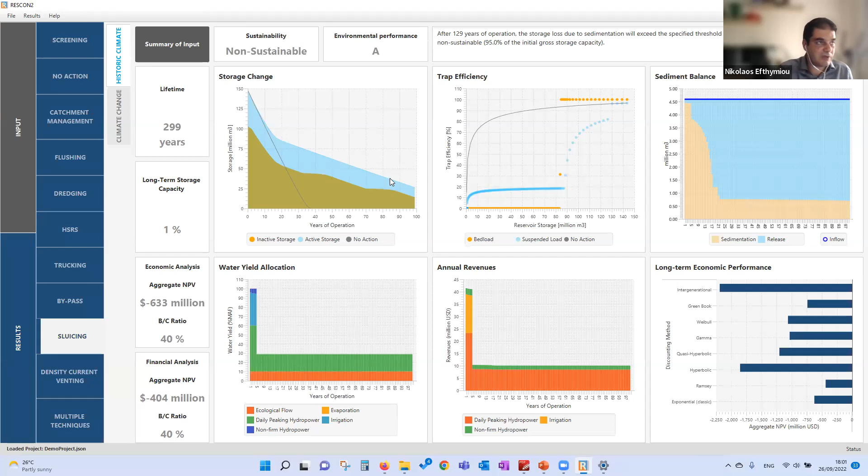What is the water level that can, on one hand, protect my storage, and on the other hand, not affect significantly the economic performance of the reservoir? Same considerations apply also for bypass. So here the duration of bypass is a very significant aspect, and the amount of the water inflow, the efficiency of water inflow diversion.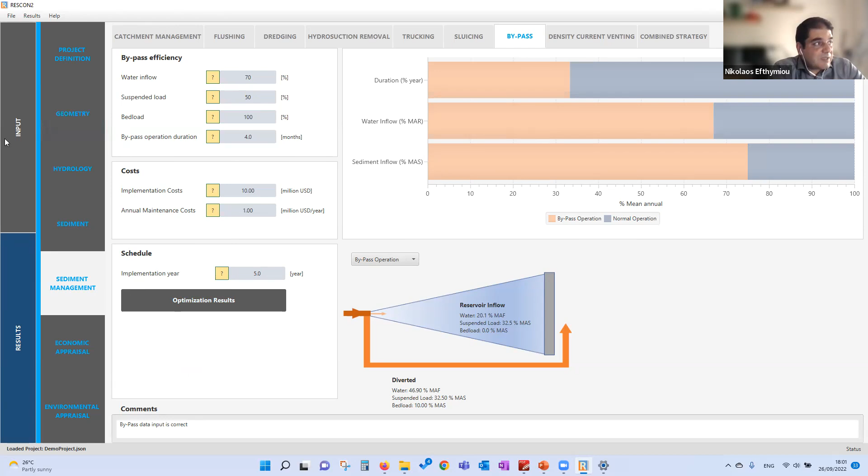We will see this tomorrow during the example that we will run on the flushing operation. At this point, I would like to return back and we go again to hydrology. I would like to show you how we can retrieve data for the climate change analysis that we will run tomorrow.

So what we can do is in Google we write World Bank Climate Change Knowledge Portal. The first link, and then we go here, it is the first page. So please go to watershed, select a watershed that is relevant for our project here. And then we go to climate projections.

So here you see different types of information. What we need for the RESCON 2 analysis is, first of all, the change in mean temperature and the change in precipitation. We'll change this again. So the precipitation percent change. Okay. Let's do the temperature.

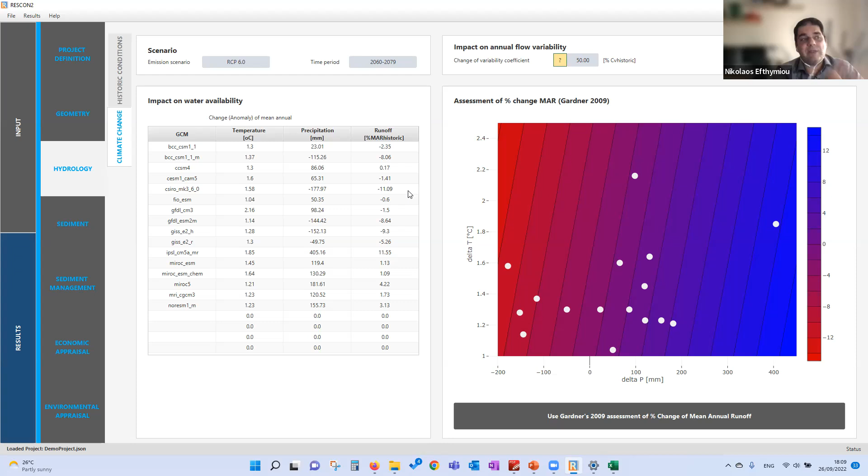Two possibilities: either we have our modeling done and we specify manually the hydrological response, or, if not available, a preliminary assessment through an empirical equation. Same applies also for the temperature and for the future sediment yield conditions. This input here you cannot double click, because this has been specified earlier in the hydrological climate change data.

But what you can do is, if you have a catchment model for the upstream catchment, you can calculate and insert here manually the anticipated impact of climate change on sediment load arriving at the reservoir. If not available, here you can insert some input that is introduced in the empirical equation that we have implemented in RESCON, and you can obtain a tentative and preliminary empirical assessment of the impact of climate change on sediment load.

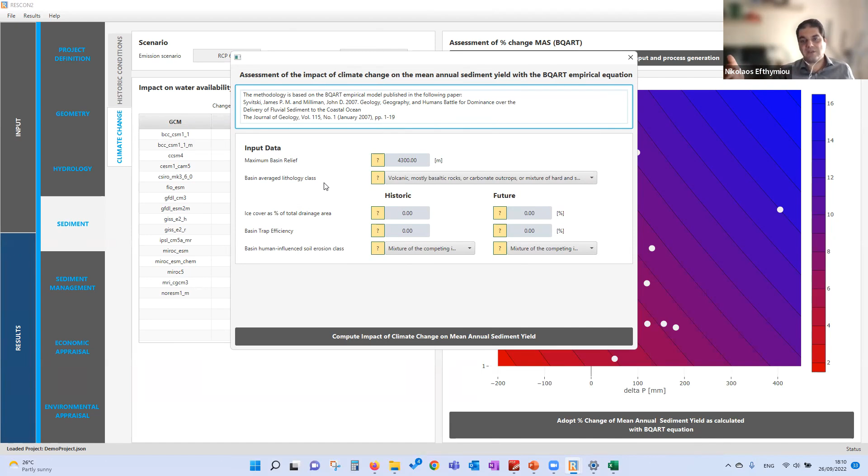You need to compare the historic with the future conditions, and it is a relative assessment. So what we do is we calculate with the empirical equation the sediment load for the historic conditions. We calculate the sediment load for the future conditions, and then we say, okay, we see an increase according to the empirical equation of 30% for these conditions. So we take the sediment load that we have specified and we increase it by 30%. So this is how it works.

And tomorrow we will go through this climate change analysis to see how sediment management can be analyzed as an adaptation strategy to climate change.

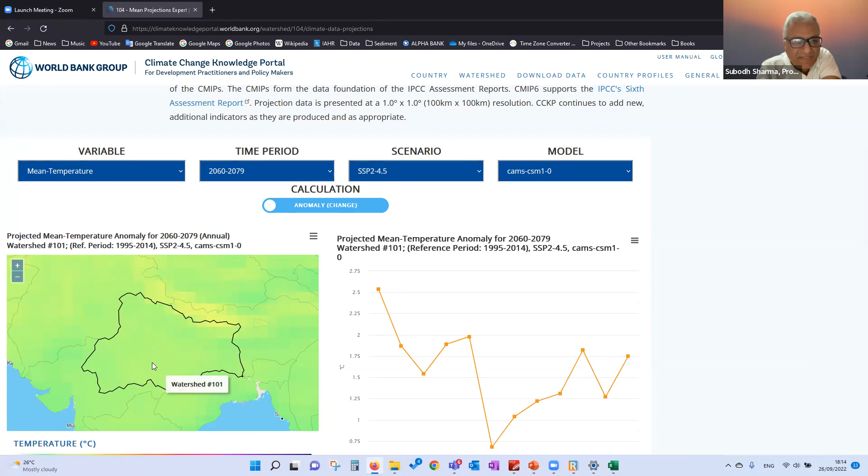But as an exercise, if you wish, I would suggest that we go to the Climate Change Knowledge Portal and use watershed 104 or watershed 103. I think that watershed 104 would be more representative of Nepal conditions. Is this right? Well, I doubt 104 would be representative. You are referring to the Western Ghats. Yeah, if you go further north, minimize, and then which one is this now? This is 101. Yeah, this again looks like lowland.

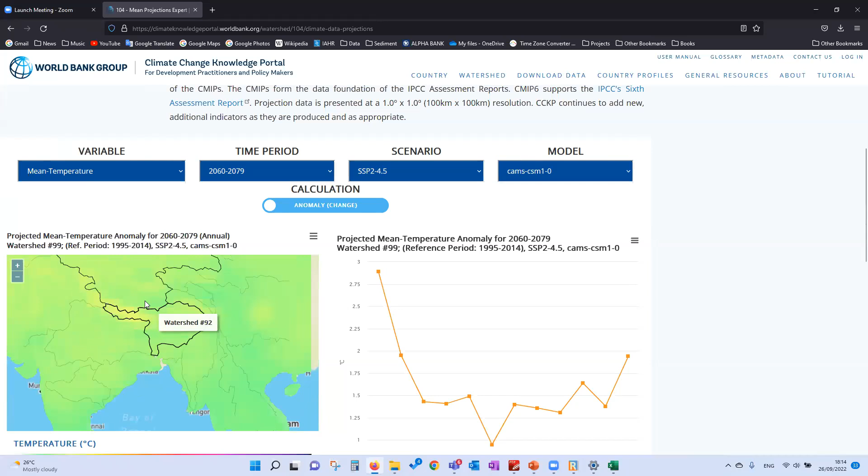Could you minimize a little bit? Yeah, this is 99. I think 99 could be okay. It looks like 99 would be quite close to Nepalese terrain. Yeah, it covers more of our area, possibly. Because 92, averaging here would be... I think 92 is too much, we cannot use that one. Chinese, maybe. So the 179? 179 is too far. Okay, then 99. Yes, 99 should be okay, because 179 again is a different territory, covering Southeast Asia.

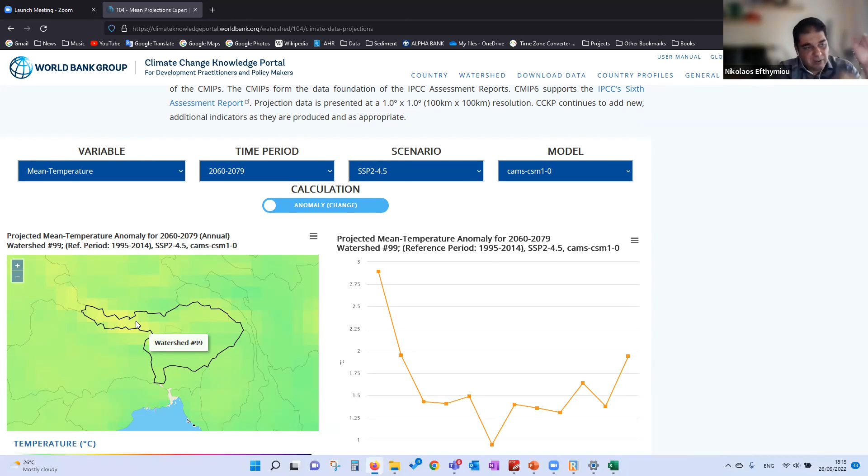Okay. So, whoever is interested, if you would like to try to download the data, I said, please, we need this in the format that you see here in this table. So the change of the mean annual temperature in absolute numbers and the change of precipitation in millimeter. Okay, we will need to process this and then we can go through together tomorrow to see how this is introduced into the model.

If you're okay with this. Yeah, I would like to see how we are also with time tomorrow. So actually to try to see as much as possible from the assessment and to see also the climate change analysis, the results. There is quite a lot to discuss there. And we see also with time, so we can discuss also several days. Let's try to take the maximum from the 3 hours that we have. Yeah, we have the same time tomorrow from Nepal time 6 to 9. Yeah, but that will also include a closing session and also certificate distribution. All right. Briefly, yeah.

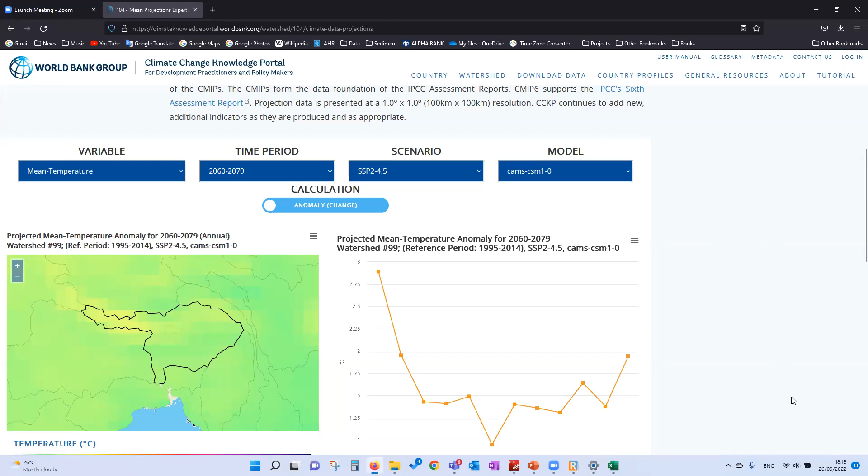I have to check actually, because I have not used the RDS myself, but I know that my teammates have set it up. But I can check with them and see if they have slides or anything on using the scenarios. Then I can share whatever information I find from them. Sunita, see if this is possible. So it would be great. Just a few minutes, so a very short presentation, because the more localized the information, the better, of course. So, yeah, I think there's been a few projects at ICIMOD that have looked at global climate models and regional climate model data sets. So there's definitely work being done. I can email the organizers if I manage to find something that I can present in a short time. Excellent.

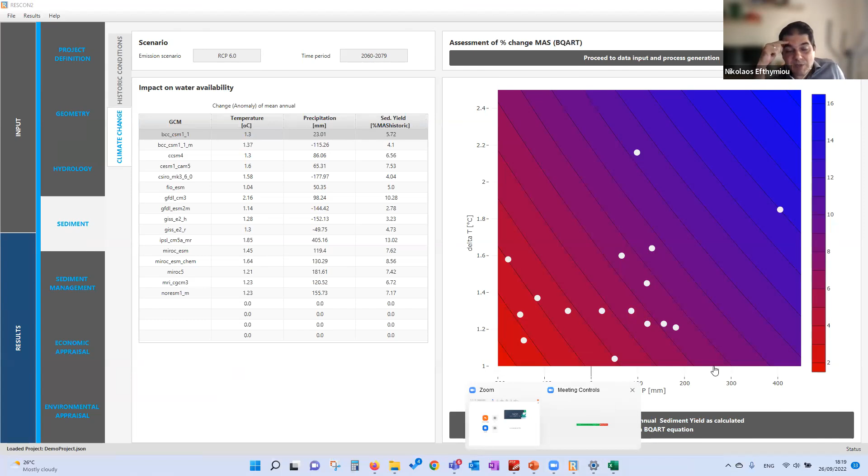Okay, so I think we're good for today. Again, Sunita, if you can stay a bit longer, I think you had one question, one issue with RESCOND, so that we can go through, and also a colleague. Give me 1 second. So if someone had an issue with RESCOND, if you can stay a bit longer in the session, and if you can share your screen, for me to get a better understanding and try to find a solution and to communicate also with the programmers. So, all right.

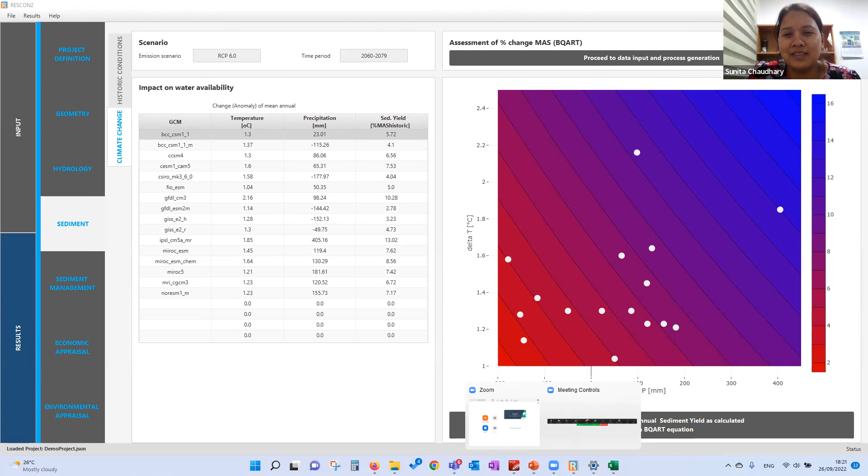Okay, so thank you so much. It might be very tiring for you. Look, I was hoping that the participants would do most of the talking, but it's better to